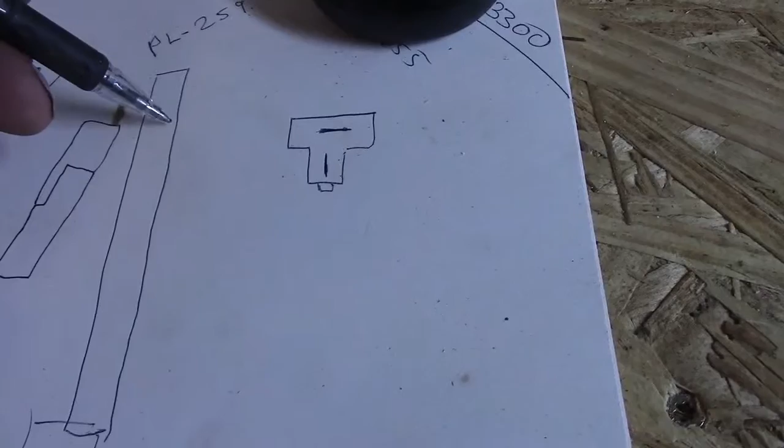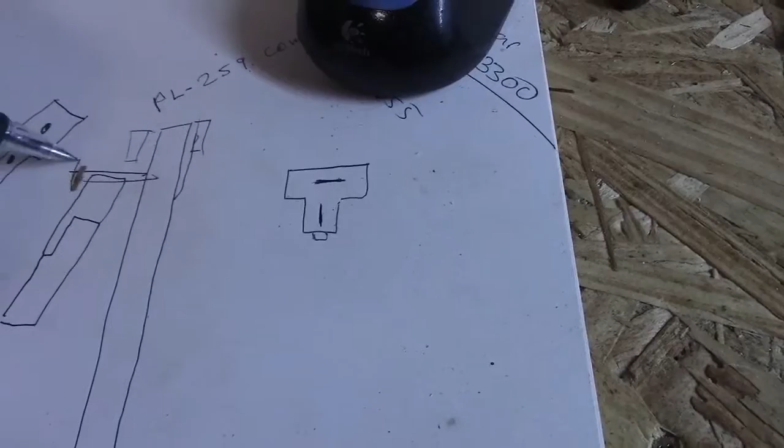Alright, for instance, in the basement we have the furnace. Off the plenum we have a duct going all the way across the basement, a big square duct. At the end of that duct it actually channels off and comes up and goes to a heat vent here, goes to another one there, shoots over here, hits another one over here, and oh, it goes down this way, gets another one over here. So basically that's the way it's at. Now,

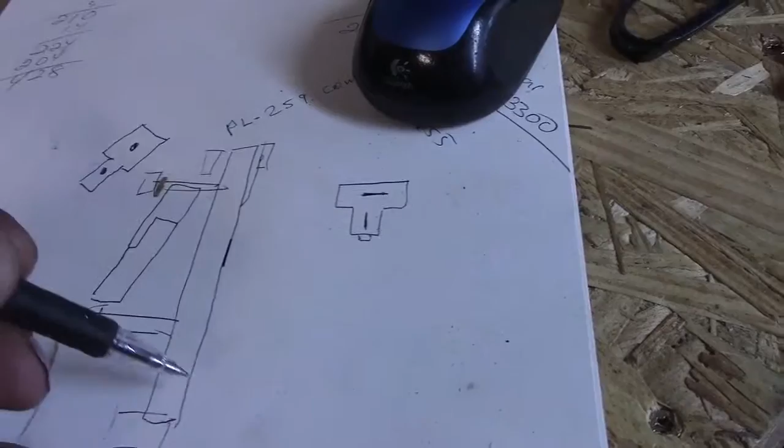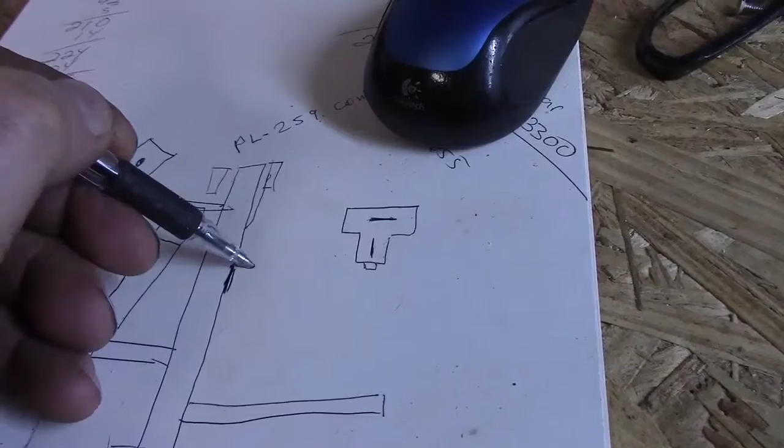they had put a spot here to put another duct. Because the kitchen ductwork was way over here, this area had no ductwork at all. This is upstairs, I'm still showing you the basement drawing. So what they had done was make a spot here for another duct, but they came off it and it goes up, and then across here has the main carrier beam. So it's almost like they assembled all this before they put it up there, because I can't get to this to get it off. You follow?

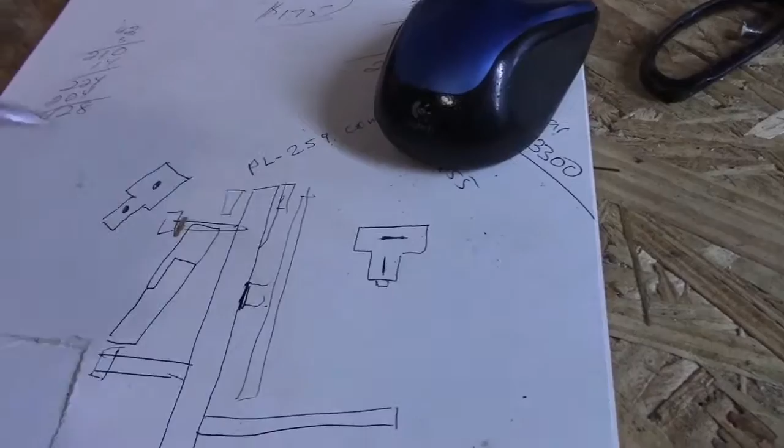If I wanted to, for instance, put a little piece of tin in there to catch some of the air as it's blowing by, because what I have to do to get any air going through this duct—this duct comes over here and comes up into the kitchen area against this wall, right?

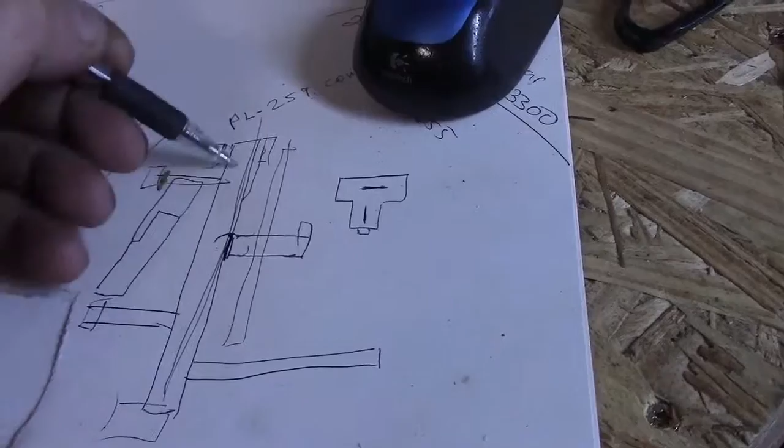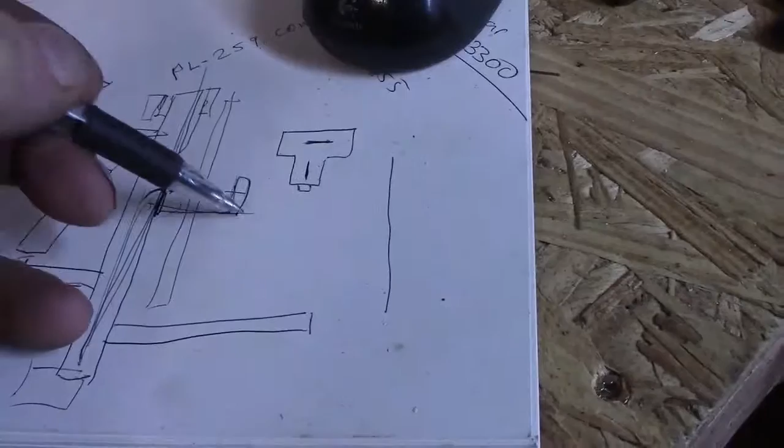I have to adjust these down a little bit because this has to fill up before it starts getting any. If I was able to get into this, I'd put just a little 6-inch opening by the height of the duct, so that when the hot air is going by, it would get caught. Anyway, this goes to the kitchen. The back porch is over here, so I came off of this one and went across to the back porch.

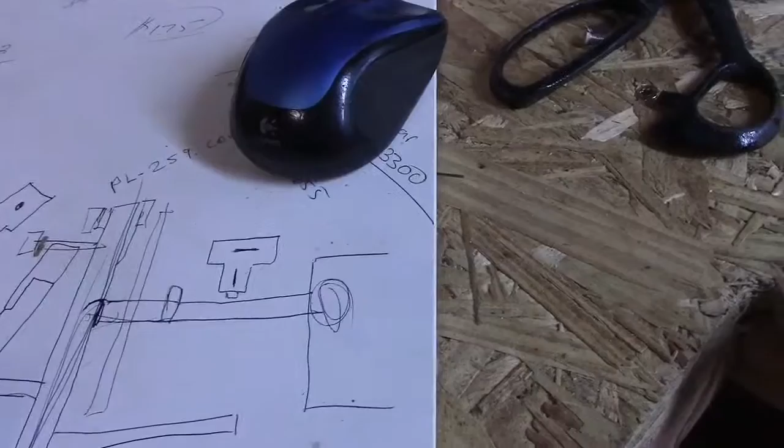When the heat's on and the blower's going, if you put your hand here, you'll feel warmth, but it's not going to be enough warmth to actually help heat up this area. So I'm going to put the booster fan in here, and I'm going to put that temperature switch down here.

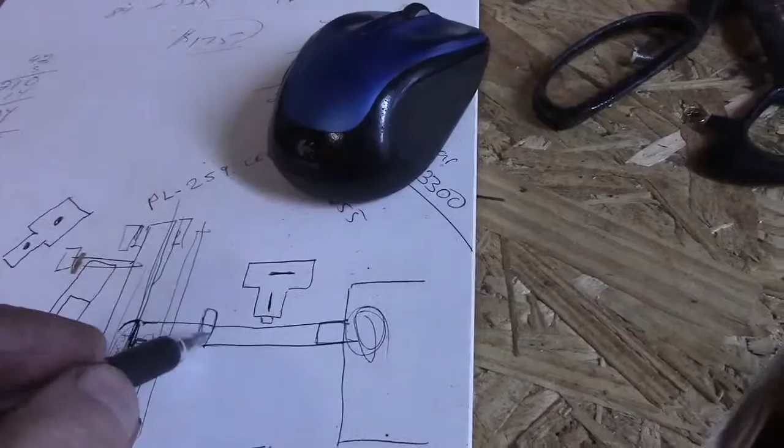So it'll pick it right up off of the main duct. When it kicks on, when it gets to a certain temperature from the heat on the duct, it should kick that fan on and start sucking some of this heat out, seeing that I have no way to divert it. The easiest way would be, if I was able to, take this off and put a piece of tin in there so I can divert some of it.

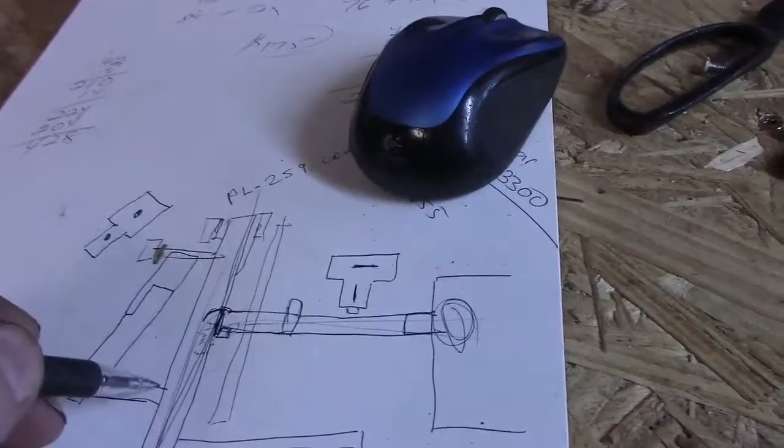If I had my way, I'd put some here too, and in here, so this way as it goes through it'll start catching. But I can't get in there because of the way it's set up. It's almost like they built the whole thing and then put it up, because the main carrier beam is right there.

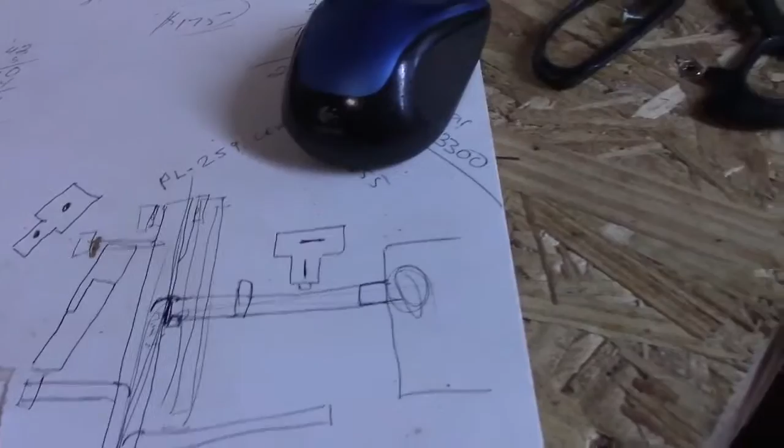So anyway, that's kind of where I'm at, if you understand my drawing here. That's where I'm at with the booster and that temperature-selective, sensitive switching, thermal switching, whatever you want to call it.

Alright guys, so this is what I'm doing so far. Lighter plug, banana plugs - I'm going to just have a couple of terminals, basically nuts and bolts. This is going to get bolted down up underneath here, so if I need 12 volts, I can just plug in and do what I got to do.

It's easier actually to have it down here than it would be up there, because then I'm going to have the cord hanging around. If I have it here, the cord is kind of out of my way. So what I'm talking about is up there versus down here.

Now if I put it up here, wait a minute, up here, and I have to plug in, I'm going to have the cord kind of hanging in my way, and it's always going to be getting around. Whereas if I have it down here, the cord will always be hanging off to one side of me, one way or the other. So that's why I'm going with it down here.

So now what I need to do is get some eyelets so I can connect to that. I got to connect to that, I just got to go through

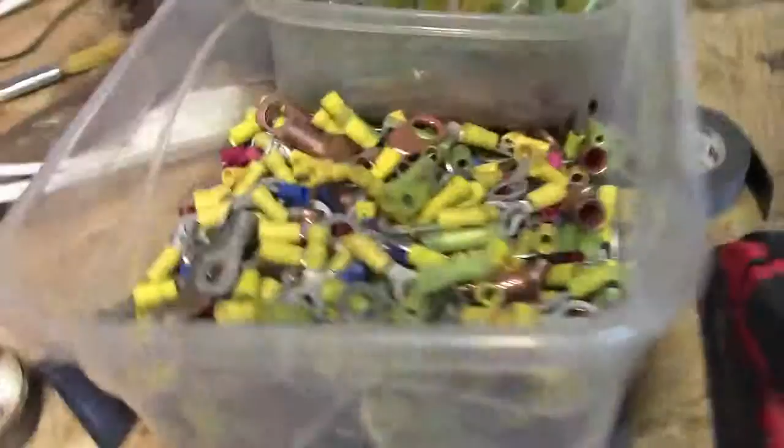the catch-all, and somewhere around here I had a hunk of wire, and I just don't know what the hell I did with it. Let me turn that down. There, okay, sorry about that guys.

I mean, I got tons of wire, but I've got some wire in here, and I have just what I need to do what I need to do without going out there and bringing more in. So I'm trying to find out where I put the wire in here, so I don't have to go out and pull more wire in here that I don't need, if you know what I mean. Oh, here it is.

Alright, this is all 12 volt stuff. So I can wire both of those by putting ends on this, and I'll show you when I'm done. I'll have more than enough. I'll bring it down, put a little fuse box down underneath there, and then each one will go to a fuse, so I'll bring a main in. Each one of those will have a set of fuses on it as well.